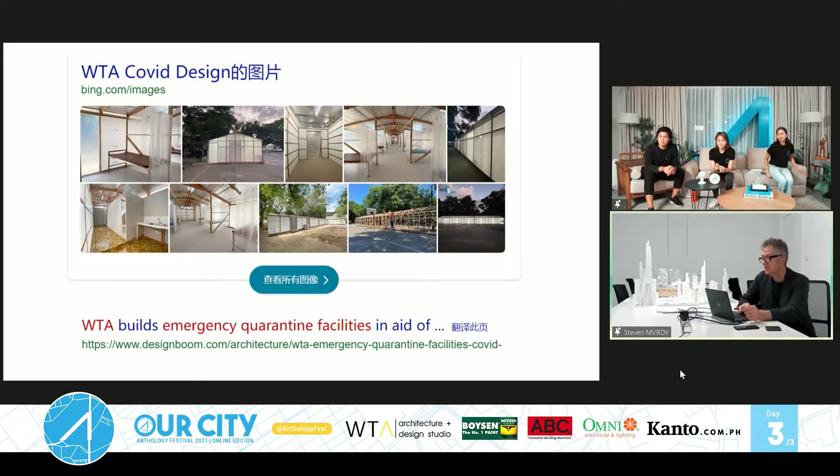I would like to start by congratulating the organizers of this forum. I was particularly impressed with the COVID design produced by WTA, as I did some research on what's going on in Manila, and truly that's acted as a very good initiative. I was impressed how fast the design was adapted for use. So congratulations to the people behind that in Manila.

We're all impressed. So actually, the theme for today is about what we call hybrid architecture, and in particular why hybrid architecture is related to the circular economy. MVRDV has always pioneered radical urban scenarios, in particular as they need to fit the challenging 21st century context. We believe humanity has reached a pivot point in history, and we expect in the coming decades, with urbanization speeding up, technical, virtual, and ecological agency will shift human behavior. We believe this requires new hybrid architecture, new relationships between the man-made, the technological, and the natural.

We will show a dozen projects tonight, and I'm going to race through them because there's quite a lot of content. By the way, like your excellent COVID initiative back in the Netherlands, our teams are basically working in lockdown, which has actually been quite interesting, given that in a way we got closer together because of Zoom. One of the reasons I could pull this Zoom together tonight is that we got very skilled in essentially working online, and I think this online collaboration has been a significant benefit, if you could mention a benefit under this lockdown.

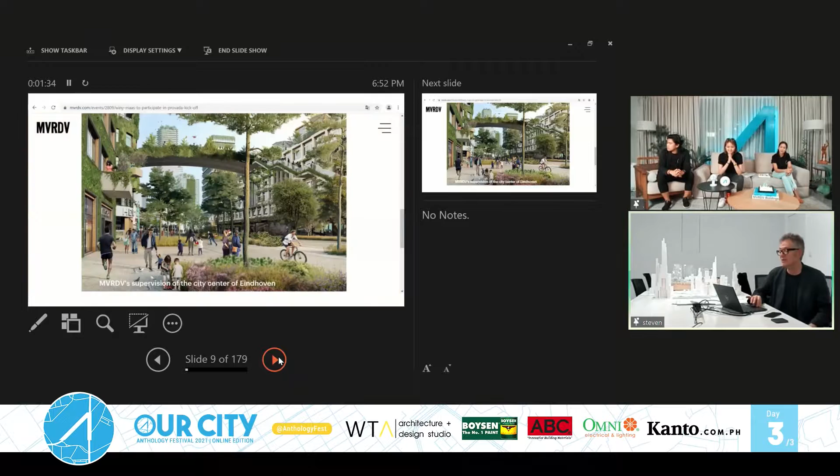So that was Winy Maas, our founding partner, very influential in urbanism in the Netherlands and globally. The second partner I want to introduce was Jacob van Rijs.

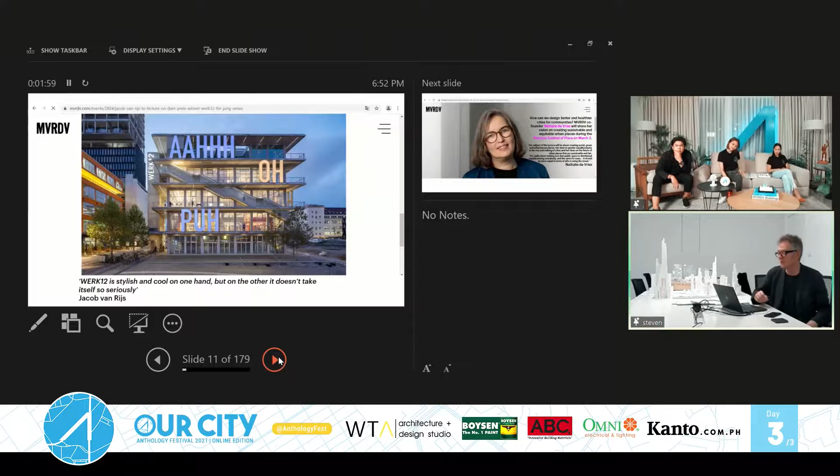His studio just won the best bit of architecture in Germany for 2020 with a building that looks like this. It's very much building in the trend of the circular economy, ultimate flexibility, understated, but with the use of an artist that reflects some of the cultural vibe in that creative hub in Munich.

Our third founding partner, Nathalie de Vries, has also been active this month in various festivals online. She's one of the most influential architects in the Netherlands and also recently won an award with this building in Poland. This is an existing building that has been given a new life.

As you can see, one end of the building is classical, an old heritage building. The other end has been basically brought into the 21st century as a creative hub, with a lot of use of local artists to really focus on the interior of the building, and at the same time bring green onto the roof and so on.

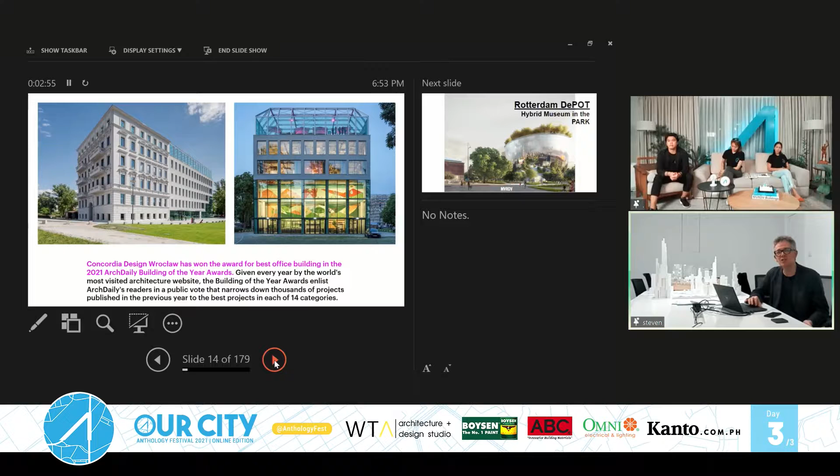This is actually typically a project that fits the talk, which is about hybrid architecture and circular economy - recycling the building, and hybrid in this case being the perfect combination of the old and the new.

The next project I'd like to talk about quickly is simply because it's in the news a lot this year. It's the newest museum in the Netherlands by MVRDV, called DePOT. It's a hybrid museum in this way, in that it's essentially a new type of museum where it's combining the park as part of the building.

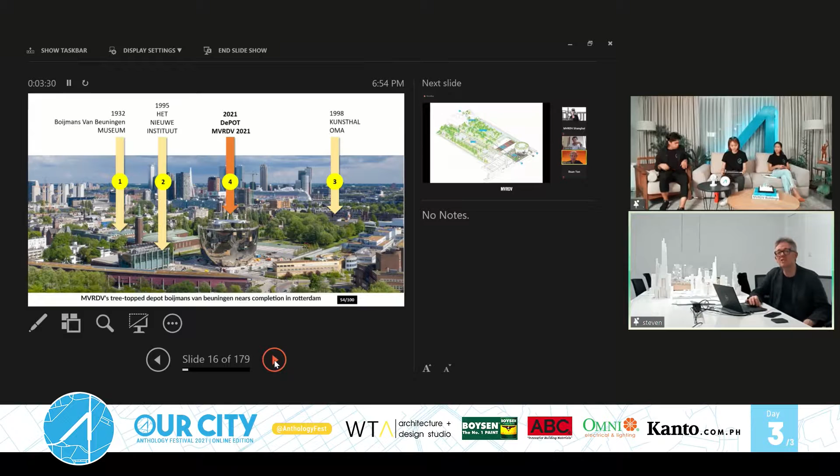At the same time, it's bringing art that is usually in the basement - the archives of the museum surrounding it - now brought above ground into this iconic building that reflects the city in a very interesting way, while it's covered in mirrors.

On top of the building, we created a new park because the footprint of the building stands in the existing park. Upstairs, after you've toured the museum, you can go and enjoy that new city forest, while at the same time enjoy food in a new restaurant.

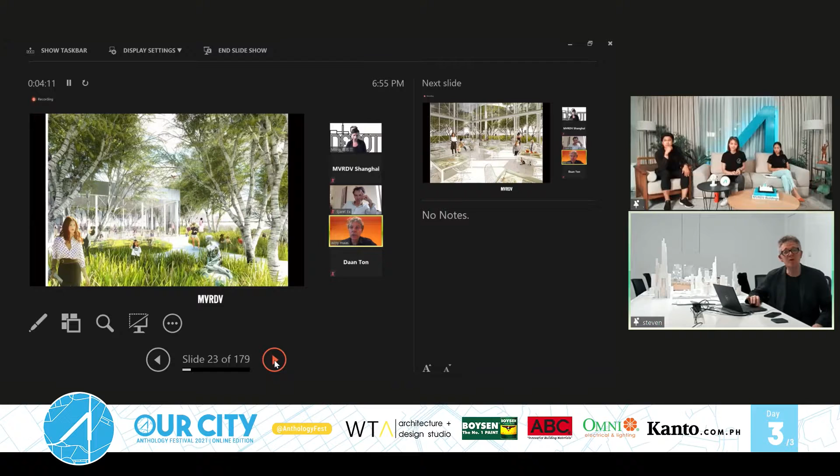So this is a building that will open this year and has a lot of impact already simply by opening up the entire ecosystem of museum conservation to a new type of museum facility - very educational in how people store art, etc. Talking about that issue of the circular economy in regards to architecture, which is very much about transformation of buildings.

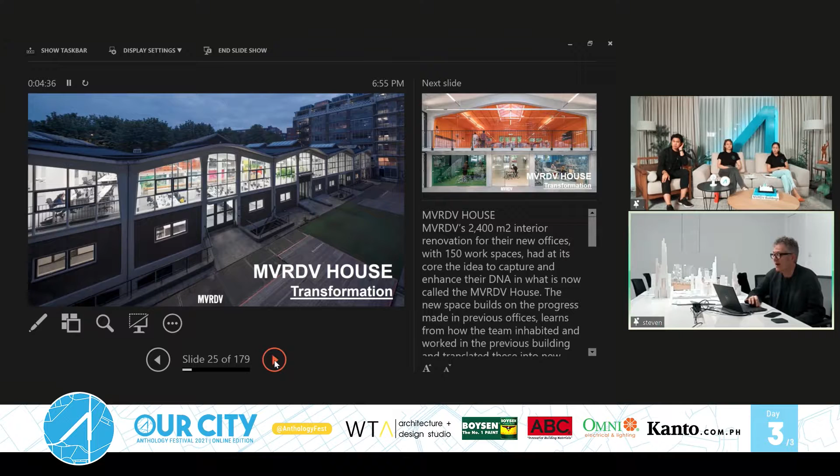Our existing office in Rotterdam is actually in a 1950s industrial building. It's called MVRDV House. It has quite a reputation in the Netherlands as that architect office that managed to create a vibrant hub around itself.

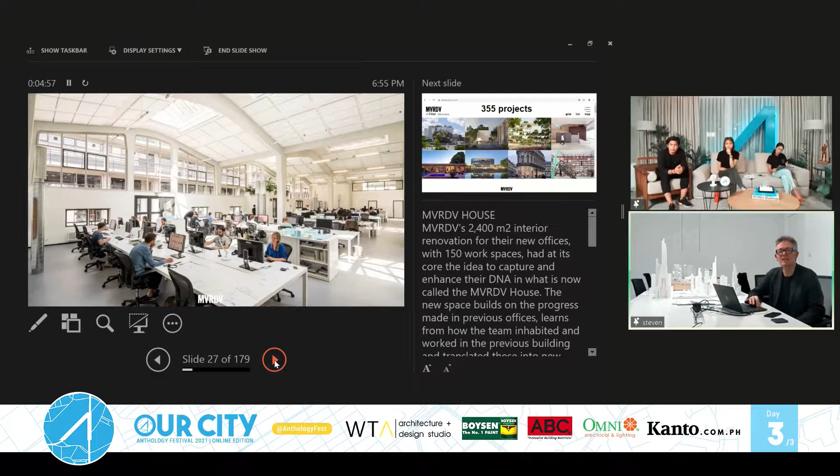It's a very open building, bringing creativity into the old industrial design of this high ceiling building, and at the same time, this is where all these projects get created.

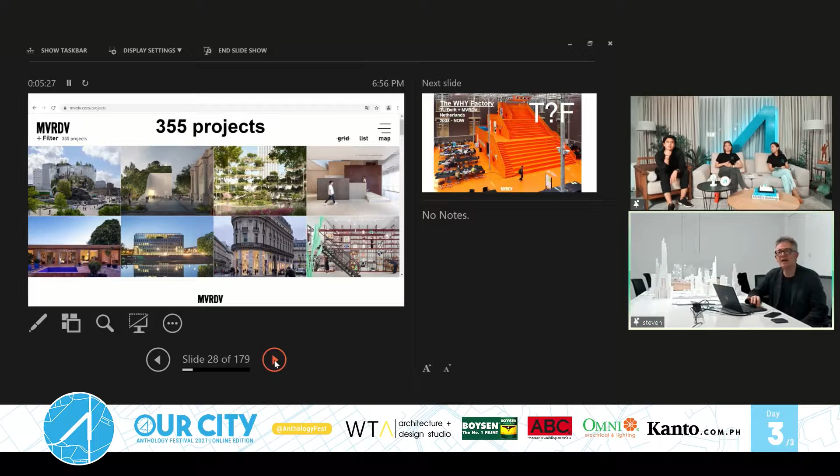MVRDV, in total on the website, you can find 355 projects. Obviously I can't show them all, but you can already see on this combination, just random off the website, that a lot of our projects include nature. This symbiosis between nature and architecture is very much a red line that carries right through our portfolio nowadays.

Another thing I should mention is that MVRDV is also deep into research and has a think tank that collaborates with the Technical University of Delft in the Netherlands. We call this the Why Factory.

This is a place where MVRDV runs a lot of research projects for master students, where the future city is investigated. It's basically a laboratory for the city. It has had a lot of global impact because of the publications that come out of this Why Factory. For instance, in China, because we have many Chinese students doing master programs in the Netherlands. Our China experience also has impact on our research, and this vertical village idea, the vertical city, is partly a topic driven by our exposure to Asian projects.

So can the future city optimize hybrid 3D public space? Can the future hybrid city truly open towers to people and nature? These are the why questions, the how questions that come from our think tank.

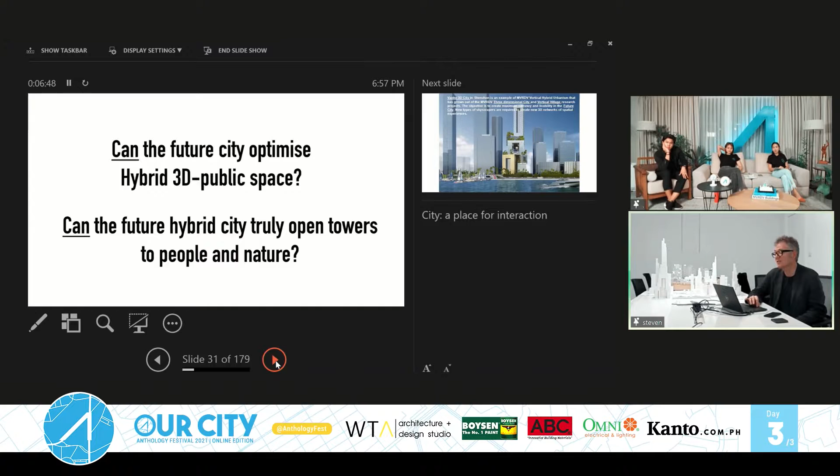I always like to start introducing our exposure to the Asian markets with this project we designed for Vanke, one of the biggest property developers in China. They wanted a new office building. We call it the 3D city, and it's very much an example of hybrid urbanism, or hybrid architecture, coming from three-dimensional city thinking.

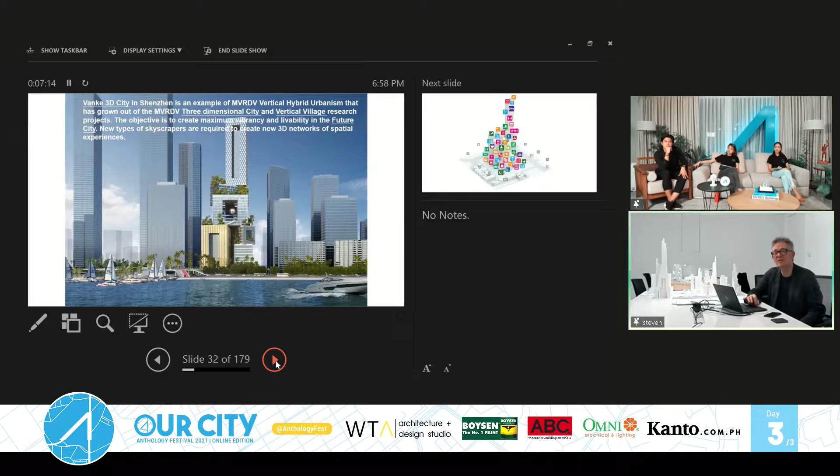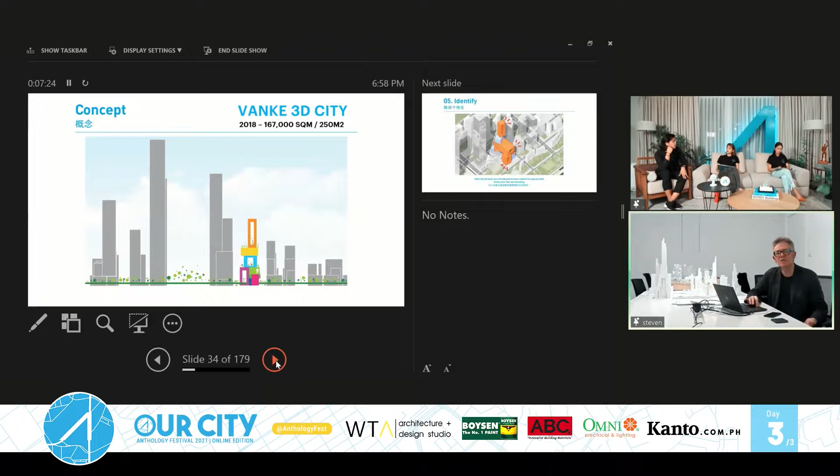You can see where we're trying to create opportunities to bring a lot of dynamics, a lot of greenery, a symbiosis of the city and nature to what is a very large-scale project in Shenzhen. This project is typical of how MVRDV works, optimizing opportunities for vertical landscape and public domain, trying to create a playful composition, a playful part of the city, especially when surrounded by vertical extrusions that become wind tunnels. What we're trying to create in this project is a more human scale, even though we're talking about hundreds of thousands of square meters.

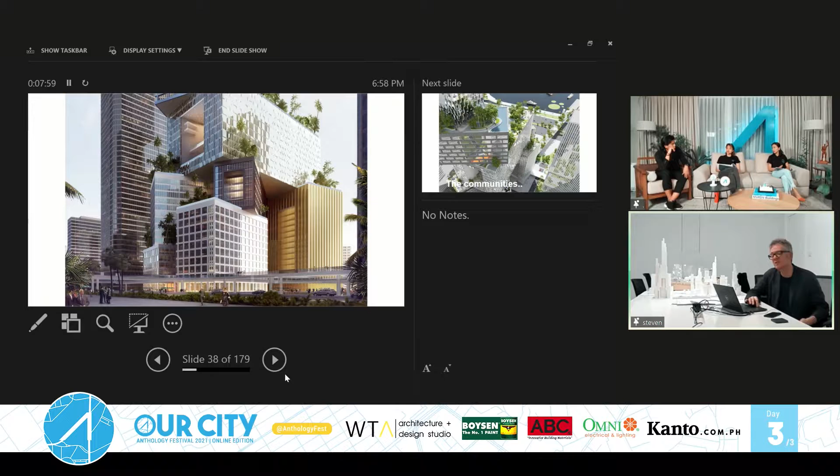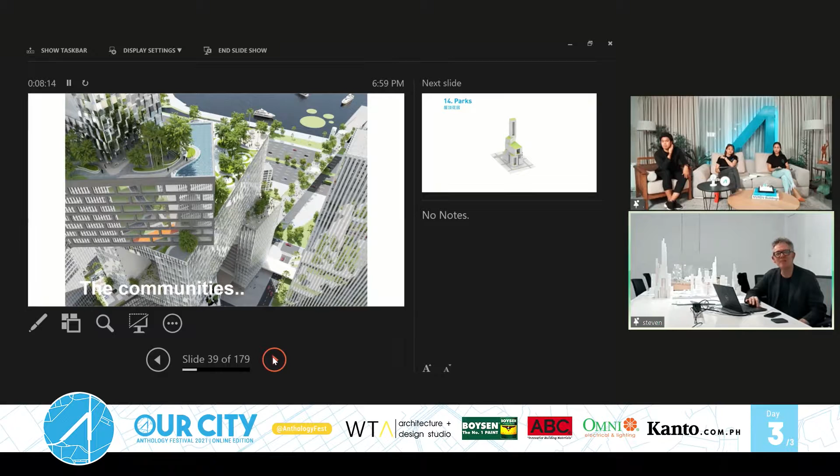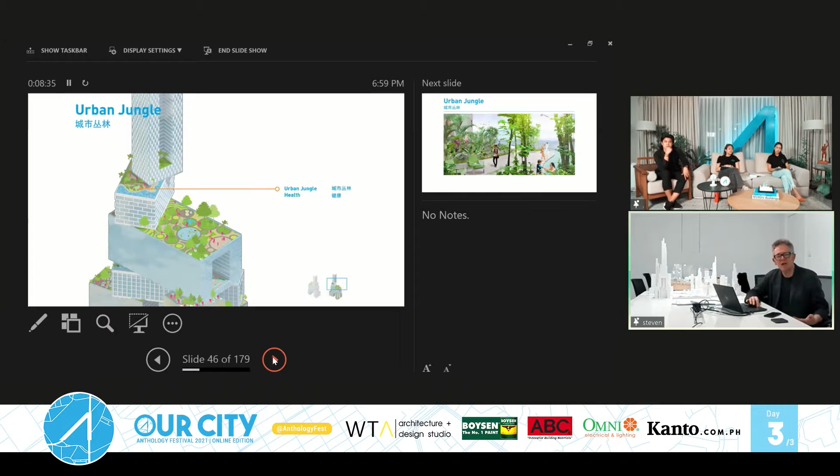Another objective in a project like this is to bring nature in its most vibrant manner to the architecture and create this vertical landscape, basically as many parks as possible within the footprint of the project, optimizing the land. In this particular project, we create a whole range of vertical gardens: a business park garden, a lounge park garden, an art park garden, vertical park, and the urban jungle that you can bring to this type of stacking of volumes.

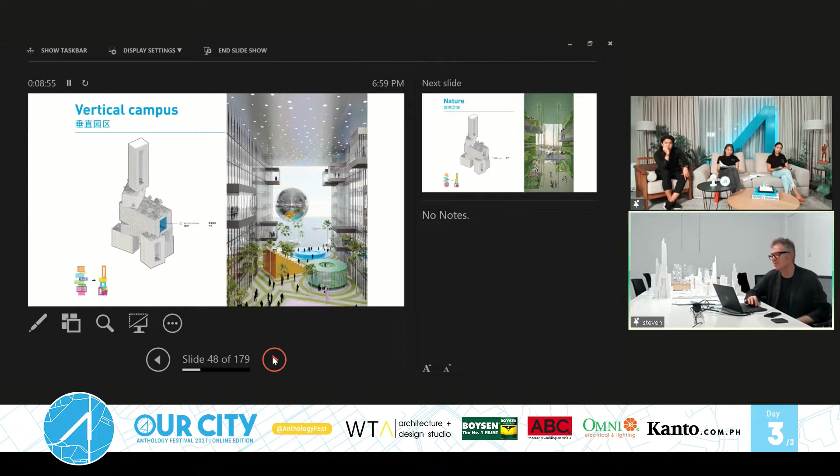What's also quite interesting, given the global nature of our firm and the fact that we are invited to many exciting projects and briefs, especially in Asia, this actually starts having an effect on our projects in the Netherlands. So in this project in Shenzhen, where we're working with big spaces or big windows into the world, that's also present in our work in the Netherlands.

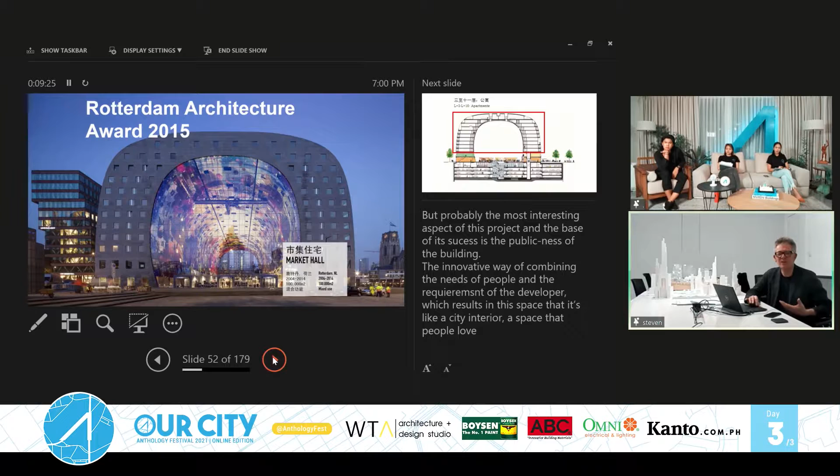This is maybe our most famous project currently in Rotterdam, our hometown, where we won this award in 2015 for the market hall. This is a scale influenced by our Asian work, and it's quite interesting how you have this cross-fertilization where a global practice brings some of its influences and ideas back to their home country.

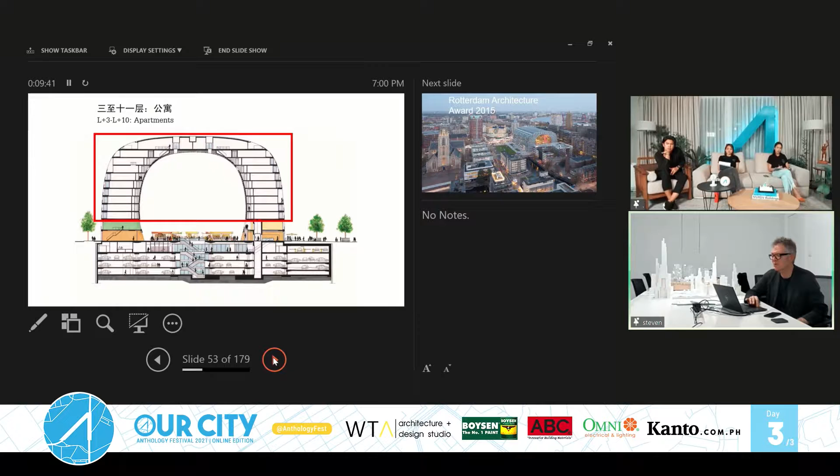This project sits in the city of Rotterdam, already slightly overpowering the surrounding buildings because of this larger scale brought to the city. But we do that for a reason, to create this radical space that expresses what happens in that space. In this case it's an indoor market hall, and it's again that sort of hybrid architecture combining the program of the marketplace while also building apartments right over this market hall, and at the same time expressing the culture of the country.

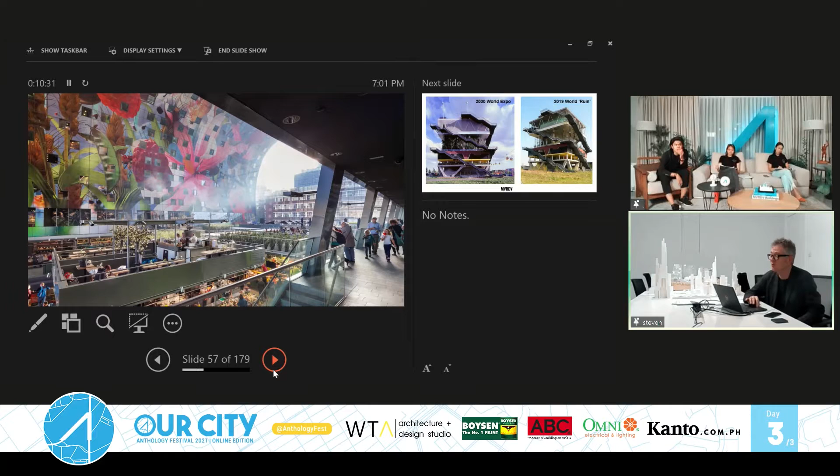In this case, the digital printing on that facade is inspired by 17th century paintings by the Dutch masters who painted still lifes that you see in museums.

Another very important project for MVRDV: 20 years ago we designed the World Expo in Hanover, Germany. 20 years later, that project became a ruin, but much loved by local youth culture.

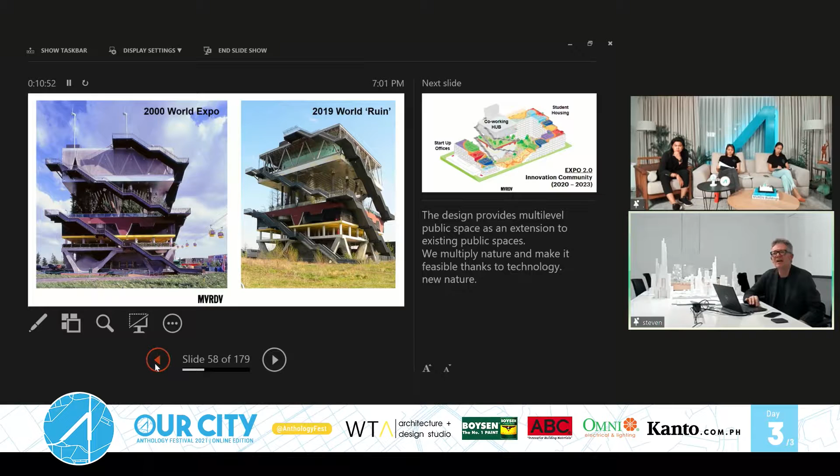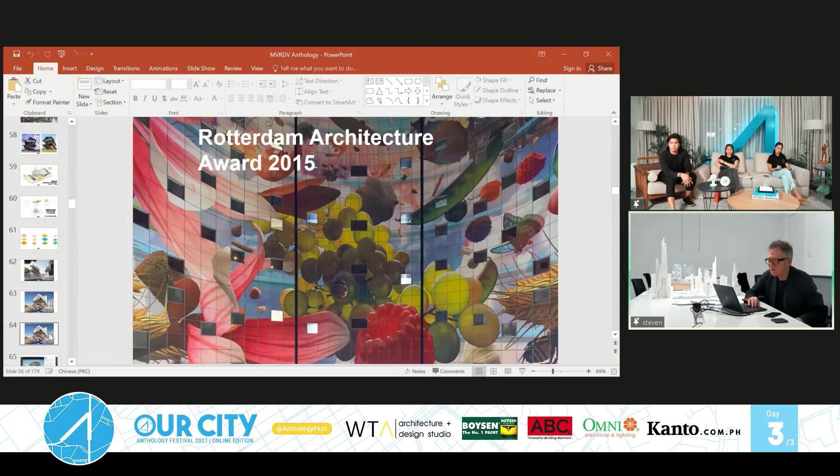Here we go again. Wait a minute. Let me go to that building again.

That Expo building, 20 years old, in the spirit of recycling, the circular economy, transforming existing buildings with the lowest carbon footprint, recently got a building permission to start construction. This is basically taking the old Expo building and turning it into Expo 2.0, the innovation community, combining the old Expo building into a co-working hub, surrounded by students who also have their startup offices nearby, a very much 21st century living and working project.

That recycled building was actually, in its day 20 years ago, probably the most radical nature city expression. It was basically one of the first projects that became a reference for including vertical landscape on the floor plates.

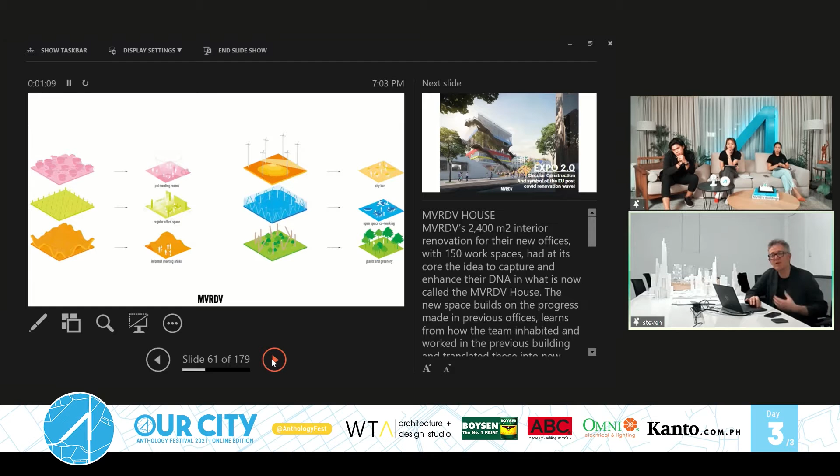Originally multiplying nature with the help of technology. Now these floor plates are being adjusted to a new function, giving us the Expo 2.0 project, which is all about circular construction, and in a way also a very good symbol of the EU post-COVID renovation wave.

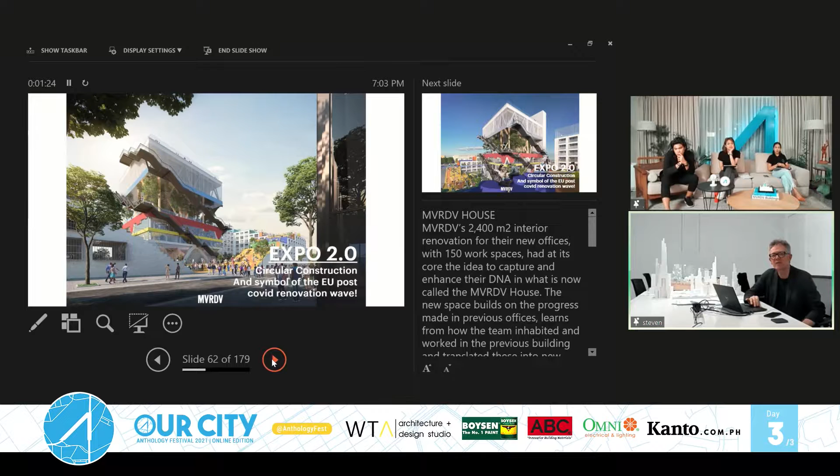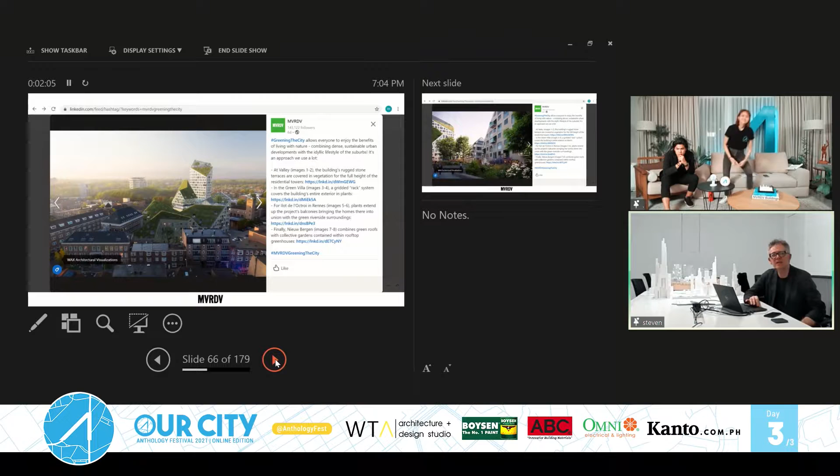You can see how that building from 20 years ago, which is very much an iconic MVRDV project, was very influential for ourselves. In recent projects there is still a lot of that spirit of not being afraid to express nature. This is in Eindhoven, where Winy Maas is advisor to the city government, and where the newer post-COVID master plans have led to far more possibilities to bring green living to the city in many different forms.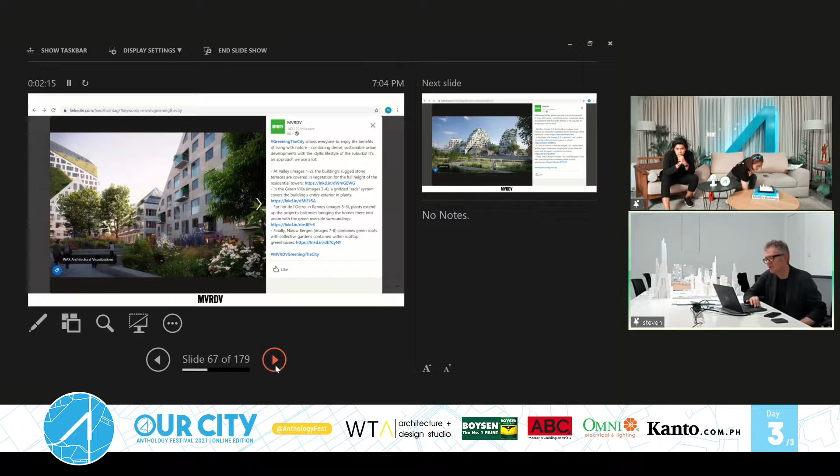So once again, it's almost like that Expo building was 20 years ahead of its time. But time has now caught up, post-COVID, but not only post-COVID, also post-Paris 15 and post the Dutch climate accords. A lot of the innovative ideas from the last decades can now actually be realized readily, and there's just a huge demand to bring green to the city in combination with circular economy initiatives.

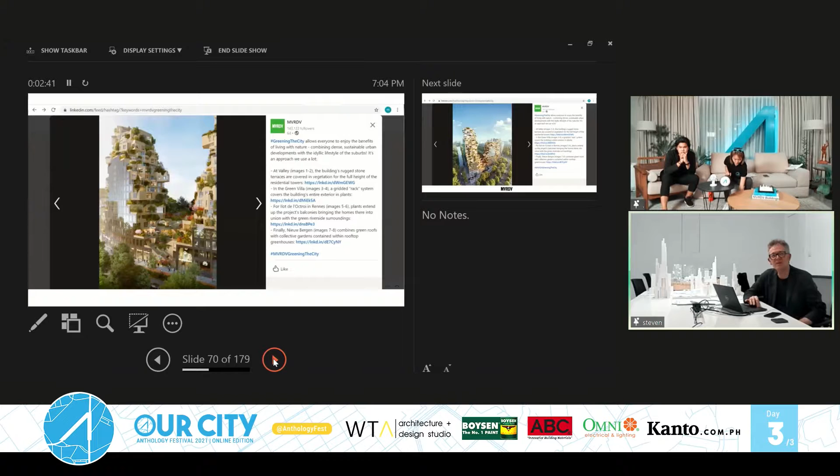This is a project that is in Amsterdam, I'll show you a little bit later. By the way, this is our LinkedIn page, which also gives an update of our current projects.

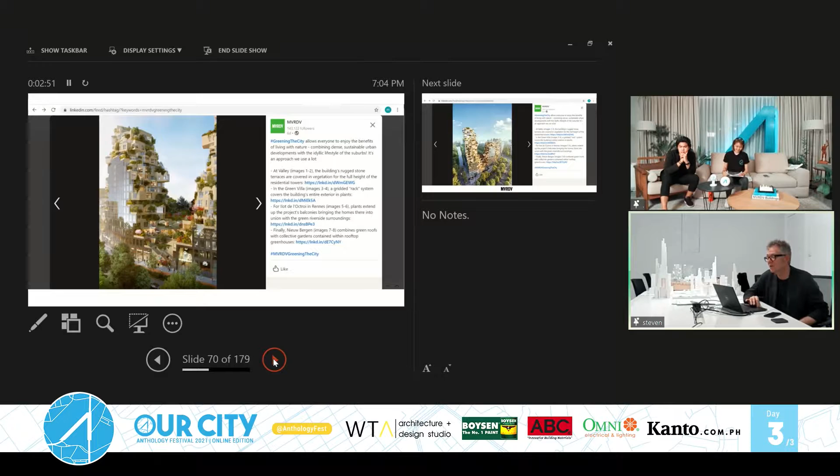Another project, again, that is about hybrid architecture in circular economy. This is a program that needs an architect every 10 years - the Floriade exhibition in the Netherlands, held every 10 years. This time MVRDV was selected to create basically a city that can hold this Floriade exhibition about flowers, that after the exhibition can continue as a new district for a new suburb outside Amsterdam. So the idea of this island is basically a flower expo, similar to the World Expo, that can then be turned, recycled into a city based on flowers and trees.

I'll just quickly go back to this thing I mentioned earlier, that MVRDV, as a Dutch company from the Netherlands, and the Netherlands being part of the European Union, a lot of thinking to do with architecture and design is very much influenced by Paris 2015. In the years immediately after Paris, very radically sustainable architecture started to be built.

And this started leading also to deeper questions about the future of construction. How does construction fit in the circular economy? Why is the built environment one of the 5 key sectors to make the economy more circular? And with circular, we mean, of course, lower carbon footprint.

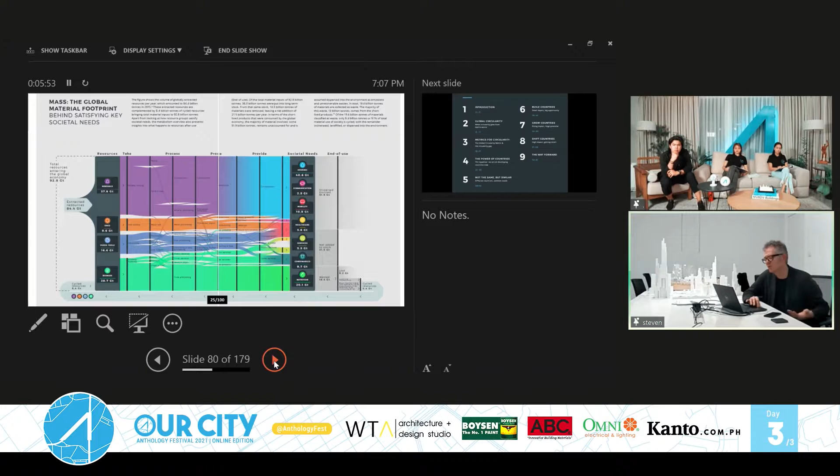In 2019, the world is 9% circular. It's in fact going in reverse, because in 2020 it was only 8% circular. These types of issues are also very much studied at the Why Factory, really looking at what's the role of the built environment in the total resources entering the global economy. So you need to look at this globally - embodied carbon. How can architects contribute to bringing that embodied carbon down?

One thing I wanted to mention, which I think is very important, is a new movement in the Netherlands, also co-founded by MVRDV, which is this open building movement.

It is part of the open building movement. A lot of architects are starting to follow a similar manifesto. I think it's going to be very influential, and they're trying to bring it to China. It also fits in tandem with the European Green Deal, becoming the first climate neutral continent. It's going to have a huge impact on architecture, in our view.

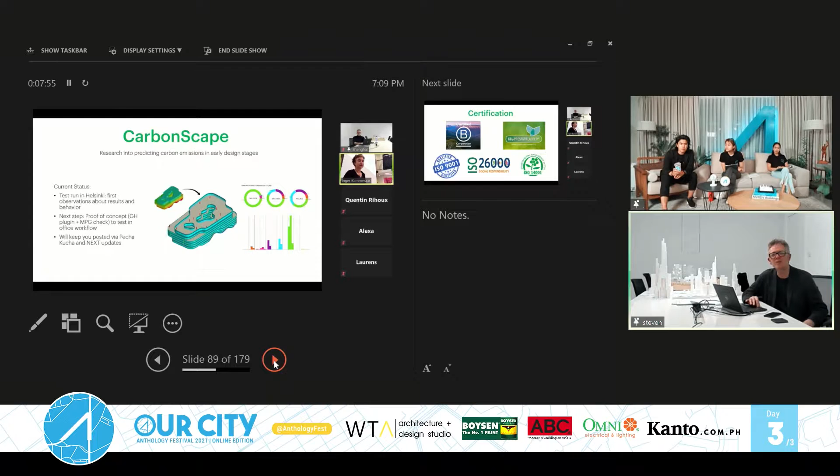This slide shows our CarbonScape software. MVRDV has a group called Next, and they develop new software that helps us design low carbon footprint buildings. This is very important because as projects and organization are ramping up, it's important to have fast tools to help deliver these low carbon footprint buildings.

For instance, one of the certifications MVRDV is part of is the CO2 Prestatieladder - Prestatieladder is a Dutch word. It means it's a certification that collectively leads to lower CO2.

Taking you to another project we're doing in Amsterdam, a little more advanced, under construction - this is the Valley project. Again, what I would call hybrid architecture, because it's a project where we bring nature into a hybrid building between a corporate office building with flat facades and a very open residential group of apartments grouped around the valley.

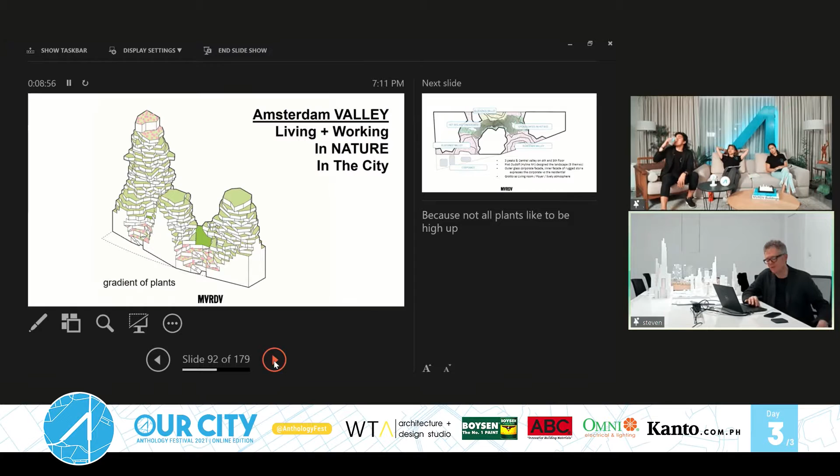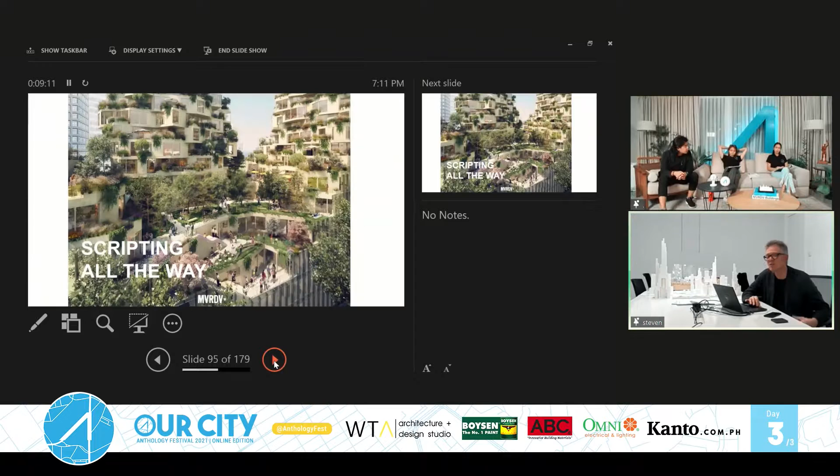If you know the Netherlands, it's flat, so to bring a valley into the city like this is, of course, very unique. This valley has planting designed by the landscape designer who worked on the High Line in New York, Piet Oudolf. He's designed the plants to suit the different climates as the building rises up to 100 meters.

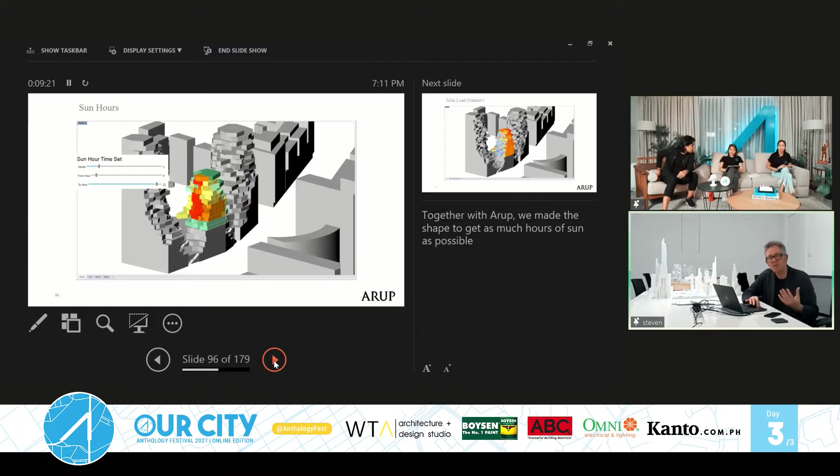We use a lot of innovative, very parametric software. It might look chaotic, but it's actually parametrically optimized for sunlight and privacy. We've been using these projects to develop better software to be more creative, while bringing in all the parameters that lead to low carbon footprints.

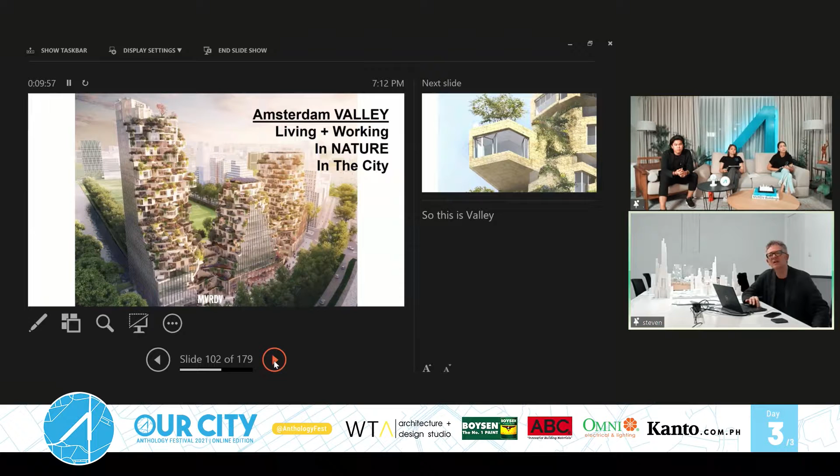This is probably the most anticipated construction project in the Netherlands. It even has a museum in it, and retail as you go up the valley. And of course, a lot of solar and sustainability features, water recycling - top of the range, new generation hybrid architecture that we do in the Netherlands.

Also, I have to say, this is influenced by some of the projects we do in Asia, because we play with similar ideas on a large scale in China as well. So living and working in nature in the city - that's a real MVRDV slogan.

Of course, I'm going to show you some China projects because that's where I'm based, and MVRDV is very excited to work in Asia in general. Of course, the problem we have here is a carbon footprint that is obscene, or how do you say it?

It's all part of the drive in China to achieve higher living standards, and a lot of the cities need serious work, and it's understandable that the carbon footprint that comes with that is large.

So in our projects, not just in China but Asia-wide, we're trying to come up with new ideas that also look at recycling of buildings, because the lowest carbon footprint building is one that, A, is not built, but B, is reused.

This is a project in Taiwan, Tainan Spring. We basically turned a department store that was at the end of its life into an urban lagoon. It's one of a kind - basically bringing nature into the city.

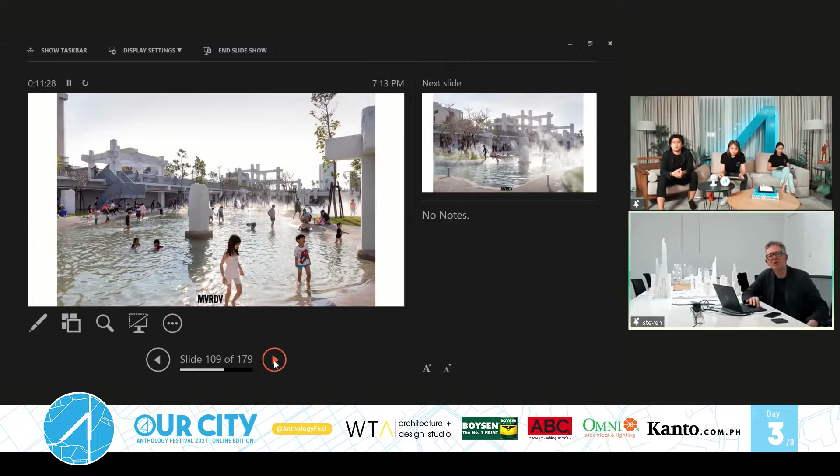This is a part of Tainan where there used to be a waterway that was built over. We bring the water back, bring the people back, and at the same time express that there was a building there, giving it that cultural connection still with the past.

In Seoul we have actually recycled the freeway, and we call this a sky garden. It's basically a planted village on a former city highway.

This has been an obvious thing to do, yet it doesn't happen often enough in cities where freeways can become obsolete, be tunneled, or otherwise bypassed. So it's a nice way to bring essentially a botanical garden on top of concrete. This is like a kilometer-long park, with 645 trees, over 200 species, and 24,000 plants, which will mature in the next decade into what used to be concrete becoming a forest.

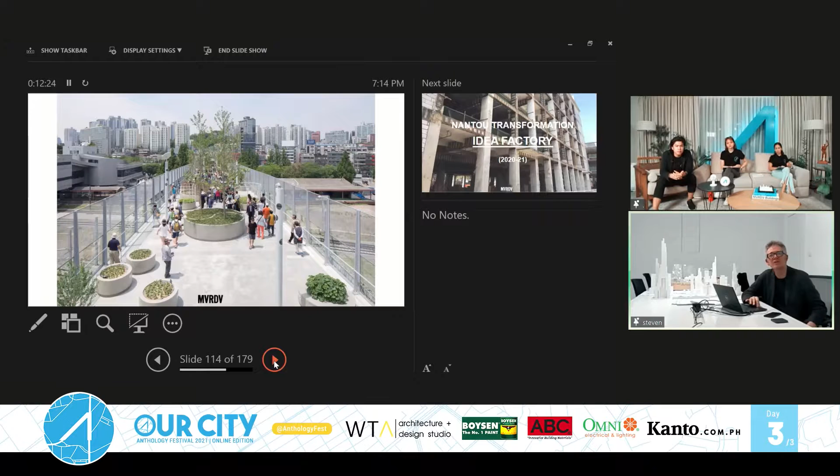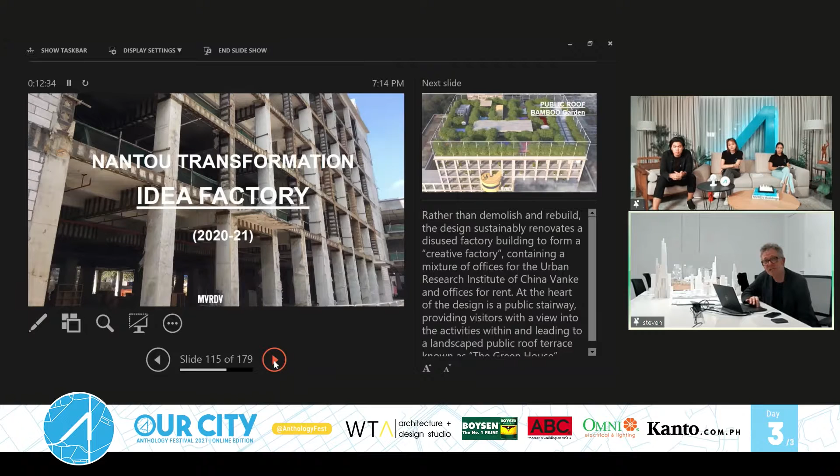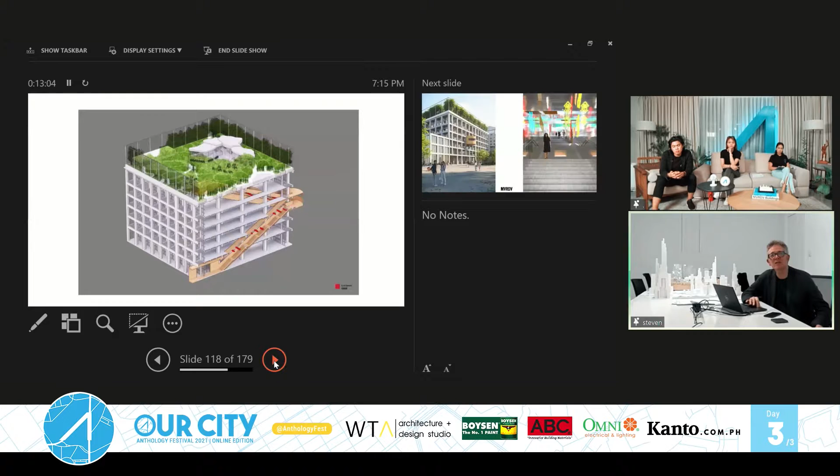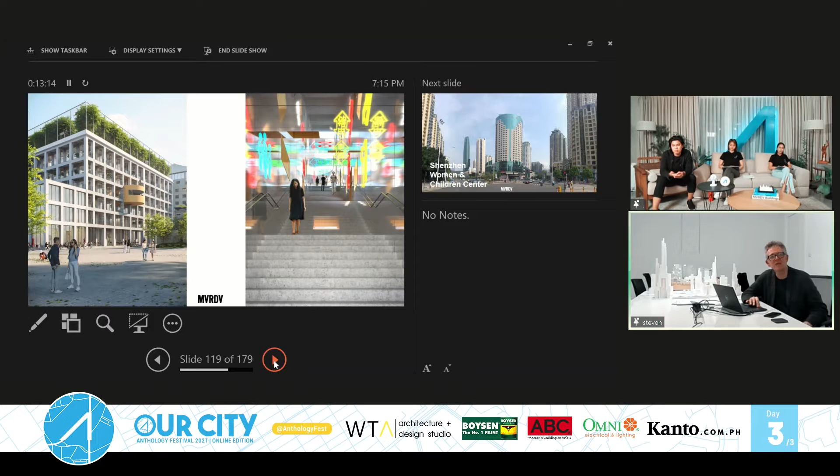Another transformation project we did in China recently is Nantou, a village in the middle of the mega city of Shenzhen. We turned an old factory into what we call a creative hub, the idea factory. We bring a landscape onto the roof, in this case a bamboo forest with a whiskey bar on top, creating a public roof where there wasn't one before. It brings a lot of green into the mega city. One key move here, given budget constraints, was to do one thing really well: tunnel through the building to give public access directly to the roof, bypassing all the creative offices for the younger entrepreneurs, of which there are many in Shenzhen.

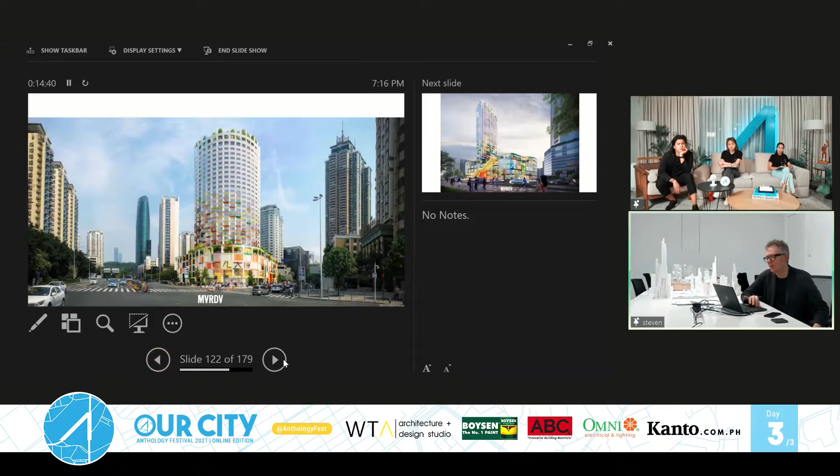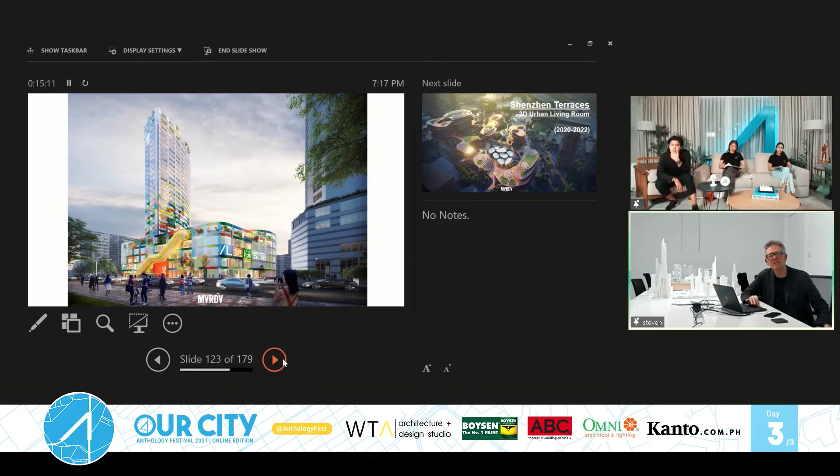You can see on the top left the gray concrete building, the entrance, and how we apply these policies to bring color in, upgrade the circulation, upgrade the facade, and turn it into a completely new personality in the urban fabric. This women's center, which has a large component of program for children, theaters, learning environments, kindergarten, apartments, and a hotel on top, will basically revitalize what is a 20-year-old part of Shenzhen. If you know Shenzhen, a brand new city, the first part of that new city has become a little worn out, so bringing these types of buildings into Shenzhen and other Chinese cities is something we're really looking forward to doing more of.

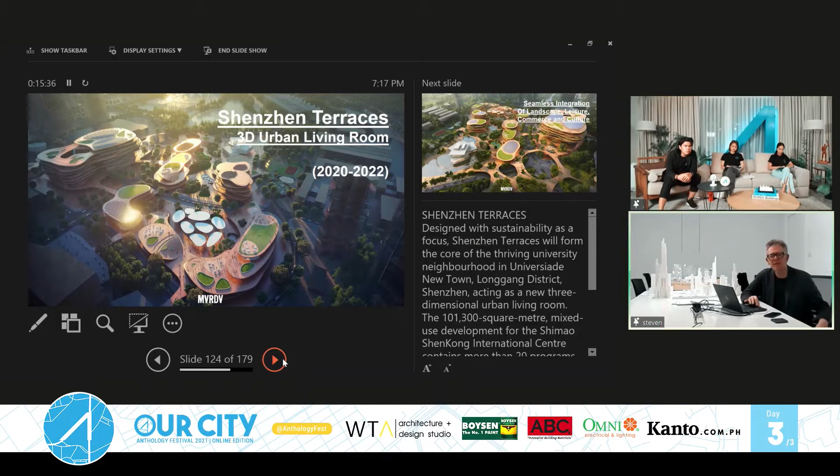While we're in Shenzhen, another typical MVRDV approach is to create an urban living room by building terrace landscapes surrounded by towers done by others, so people in nearby apartments and offices look down onto a terrace landscape. We're inspired by the famous rice terraces in China, but the key here is to achieve seamless integration of landscape, leisure, commerce, and culture. This project will start construction soon. It has very high sustainability content and is again a hybrid between landscape and city, with a very dynamic program including theaters, libraries, and cultural centers, and as it overgrows with landscape, it will basically become an urban jungle.

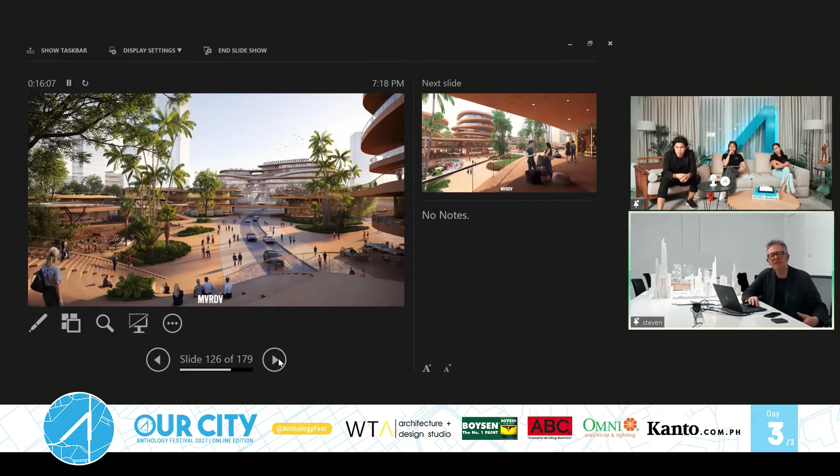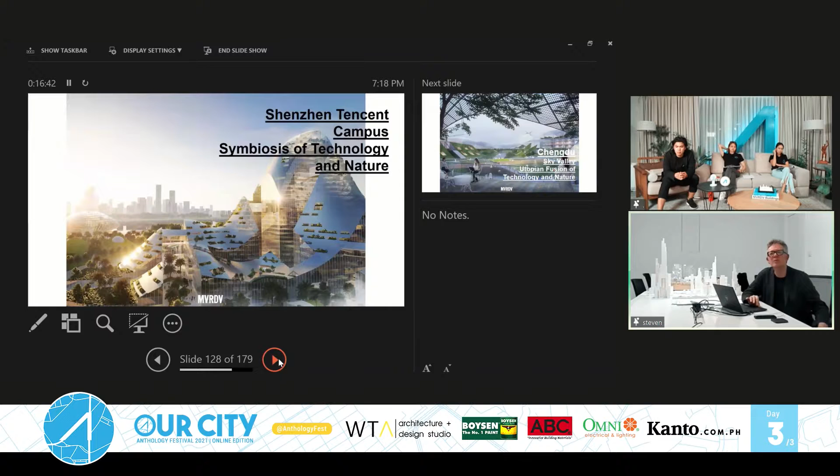One of the larger projects, a new idea we worked on, was for Tencent, basically the Facebook of China. They own the WeChat ecosystem, and Tencent is building a new city for their very fast-growing workforce. We worked for two years on a project trying to optimize the symbiosis of technology and nature, bringing a massive amount of solar cells into a campus. We lost that competition, being too radical, but these ideas were used in Shenzhen and made their way into a new project in Chengdu, which we call Sky Valley, again a utopian fusion of technology and nature, adjusting ideas from the unsuccessful Shenzhen competition to fit the Chengdu brief.

I don't know if people know Chengdu, but it's in Sichuan, and it's not flat, it has a slightly hilly landscape. What we tried to do, as you can see here, is contrast with the surrounding, more generic Chinese urbanization thinking by working with the topography of the landscape instead.

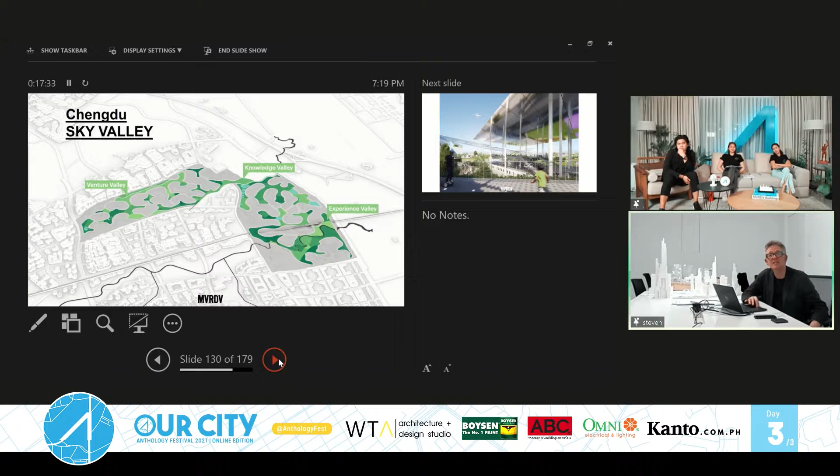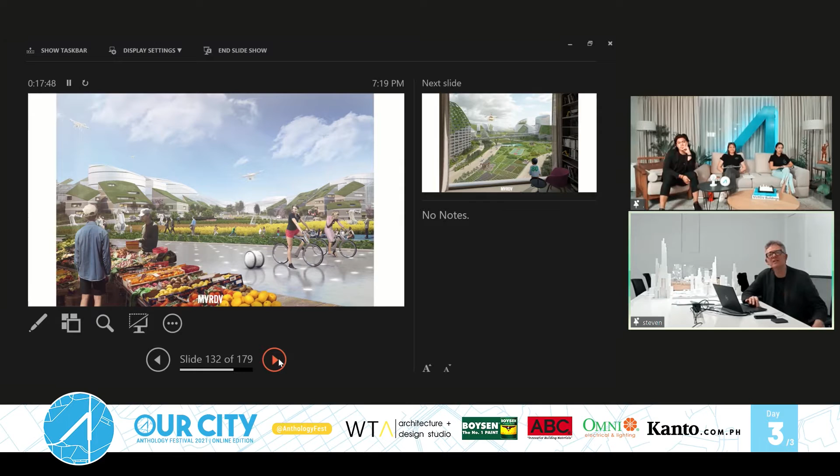Essentially what we're doing is building a city sitting inside an urban farm. Sichuan is very fertile land, and it would be a pity to build over it. So this future science city is combined with a farm, and there's a lot of this type of thinking and design going on in China, not just by us, but by a lot of Chinese firms, avant-garde firms, and international firms too. The Chinese government is also open to these hybrid cities, which increasingly influence older city planning standards.

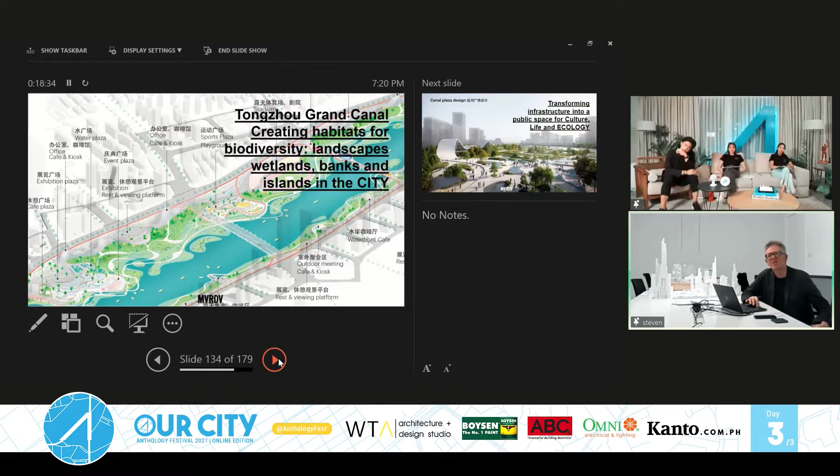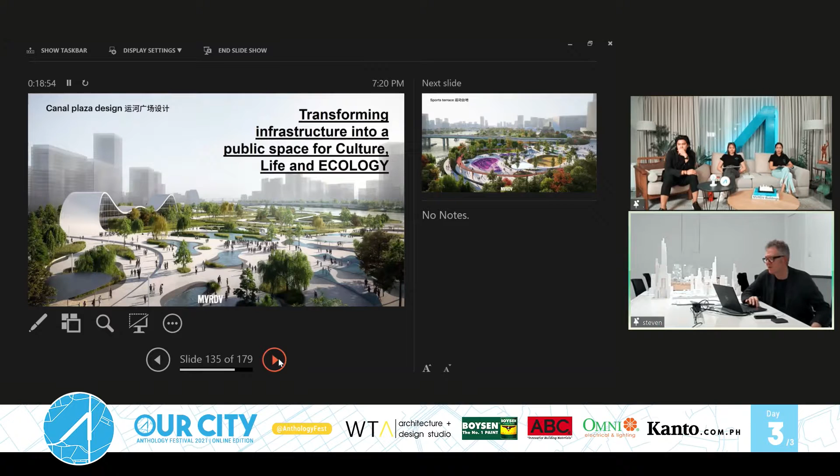In Beijing, on the Grand Canal, we're creating a habitat for biodiversity by naturalizing what is essentially, at this point, a relatively industrial straight waterway. We're naturalizing it to allow more room for the water, wetlands, islands, etc. in the city. This is a typical competition in China where the government is extremely ambitious to counter the monotonous concrete jungle that has been created, knowing it needs to improve for the well-being of citizens in the mega city.

So as you can see, everybody is very active in landscape, urban planning, urbanism, or hybrid urbanism, as we call it. Besides being an urbanist architect, Winy Maas is also a licensed landscape architect, and we cannot think of architecture separate from landscape—it is part of the same. You need all these disciplines to get these holistic solutions.

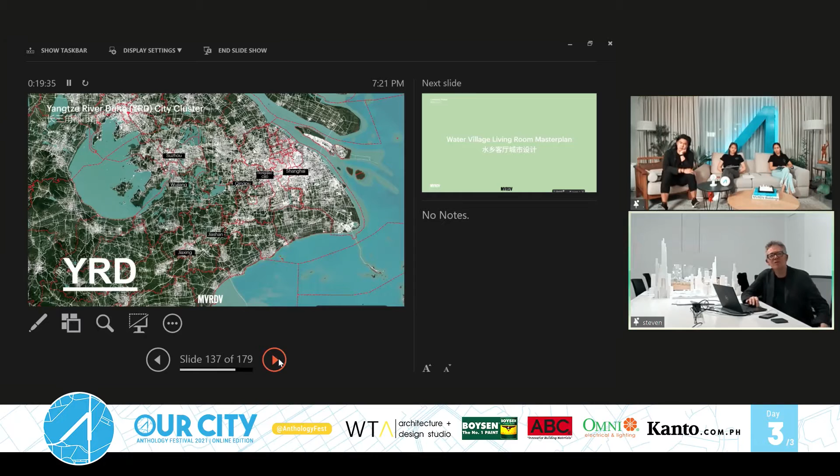YRD stands for the Yangtze River Delta, the provinces outside Shanghai, and we have various projects going on. One of them is what we call this Water Village Living Room Master Plan. Around Shanghai you have these old water villages that have an interesting relationship with the water. It's a very flat delta, and some of the older villages need to bring new life in—the young people have moved to the center of the city, and the villages have become empty.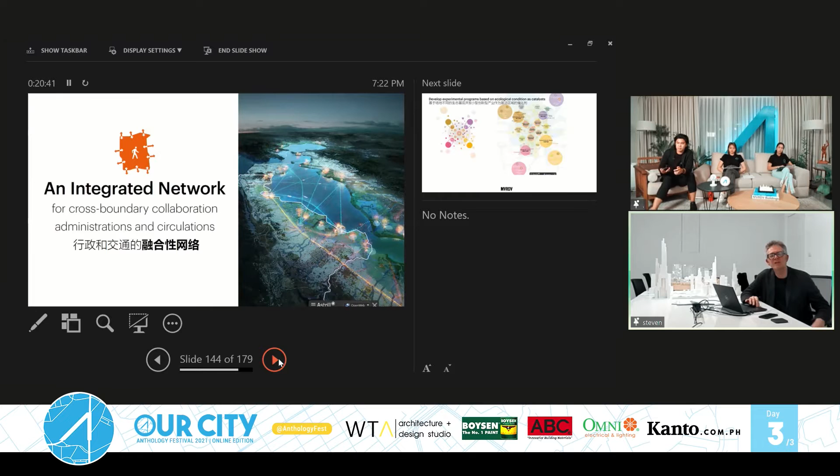So we bring in a new economy, new landscape. A lot of the ideas come from our Dutch projects because we're also in a delta in the Netherlands. But again, we're trying to create a symbiosis between human, flora and fauna in the water villages surrounding Shanghai, and to create this integrated network, cross-boundary collaboration, because these villages sit within different administrations and span a wide area.

These type of larger policies could achieve this cross-boundary collaboration, essentially creating a new economy for places where most of the industry has become obsolete, bringing new experimental programs and experimental economy. In fact it's based on circular economy thinking and ecological conditions—a typical exercise we do for the Chinese government around Shanghai. In Shanghai we also do zero carbon, zero emission type projects.

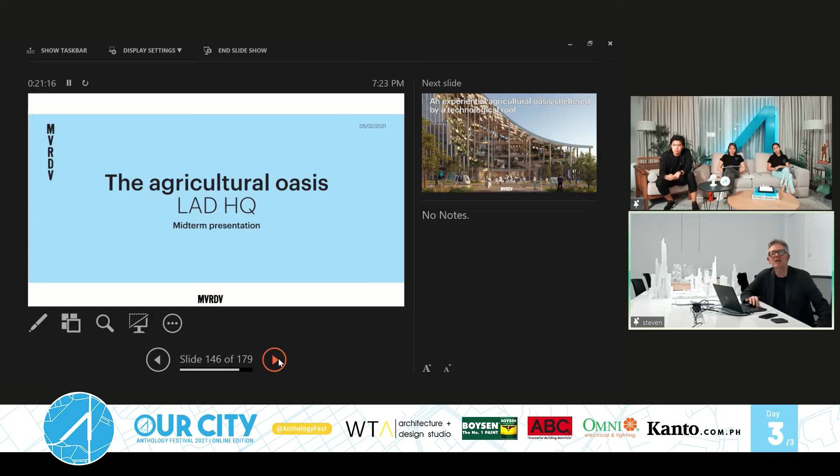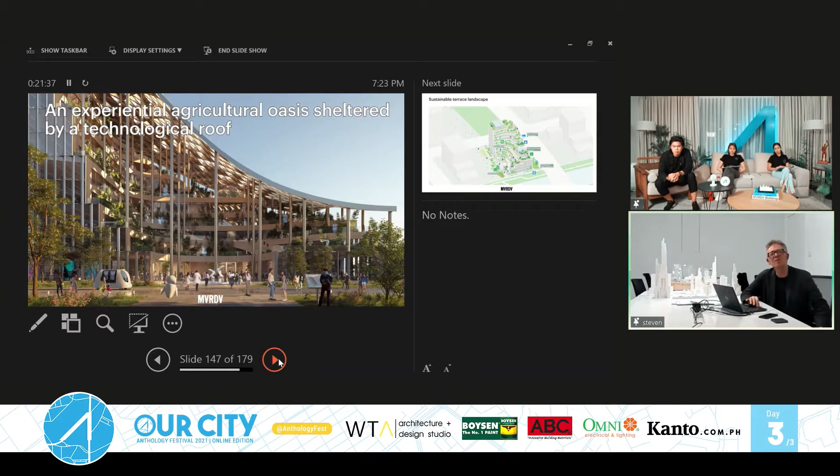This is a headquarters for an agri-business company, where we again play with this terrace idea, and also achieve that zero carbon footprint making heavy use of solar panels, while trying to create a comfortable set of environments under that roof in summer. Shanghai is quite a hot city in summer, with a lot of solar load.

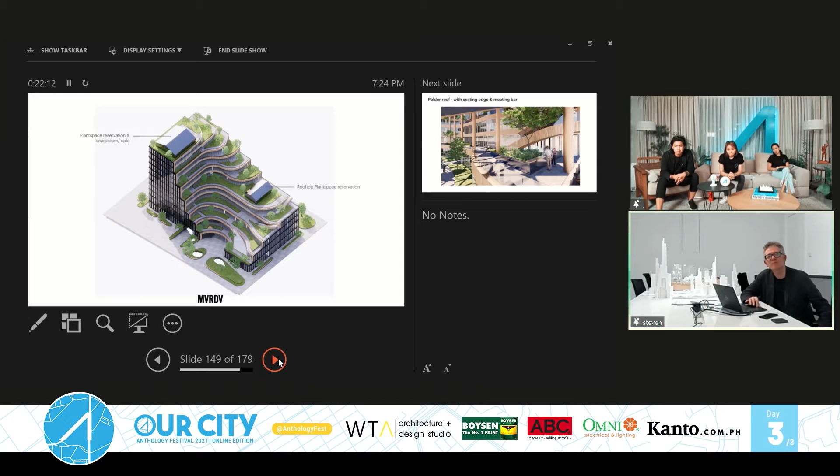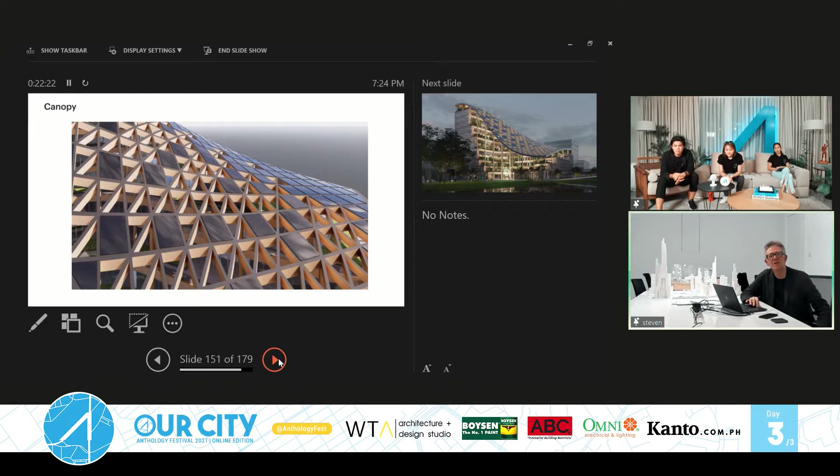So as you can see, under that roof we terrace the building, giving all the office users access to greenery, and at the same time, in a clever way, we include solar on the curtain walls. There's a lot of opportunity to take the green right through this project, including the solar canopy, which is optimized for solar exposure.

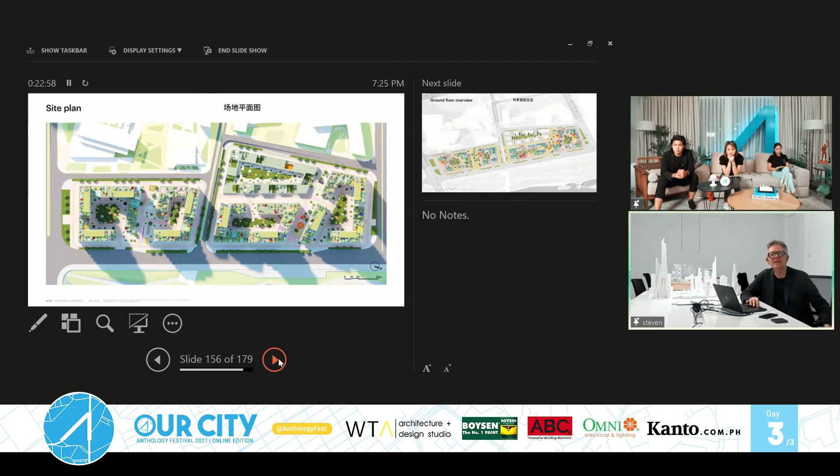What we've designed for them is a community that is completely modularized. We're working on a grid, with apartments that are optimized and can be stacked in different ways, and at the same time, by stacking, allowing a lot of greenery to be included in the composition.

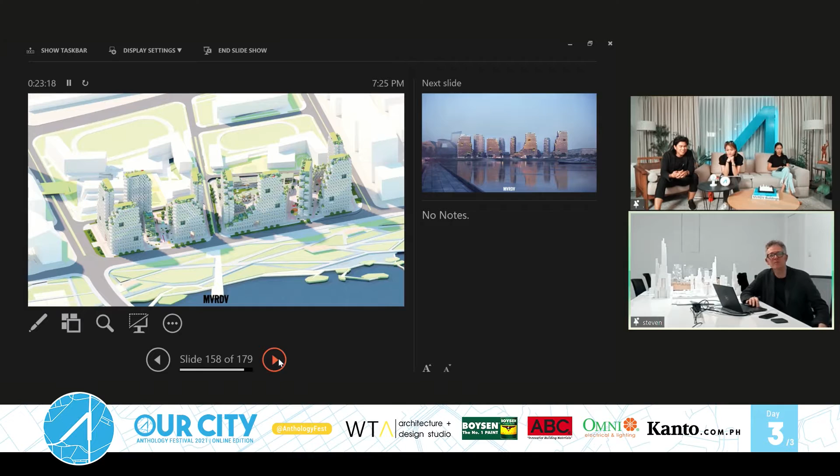We're trying to work with Chinese manufacturers that are now coming up, with government support, to move very much into prefabrication, because these prefabrication units can have a low carbon footprint that allows a lower carbon footprint for the entire community. It's got voids in it, as we always do in our vertical projects, to bring open space that can be shared between these studio apartments.

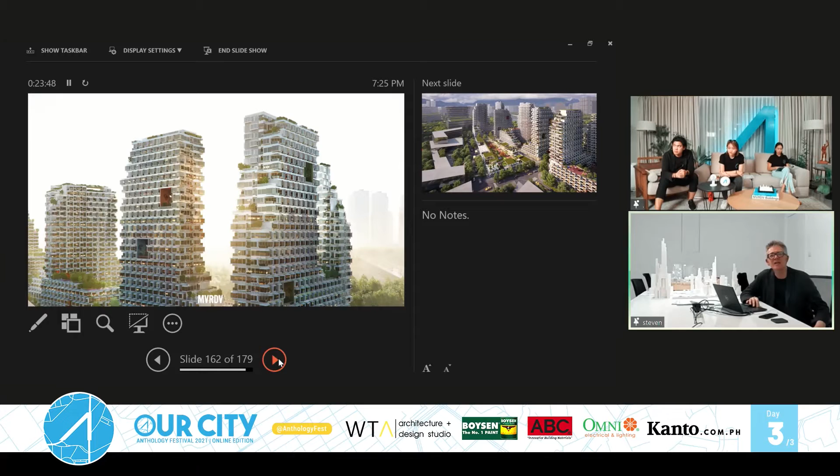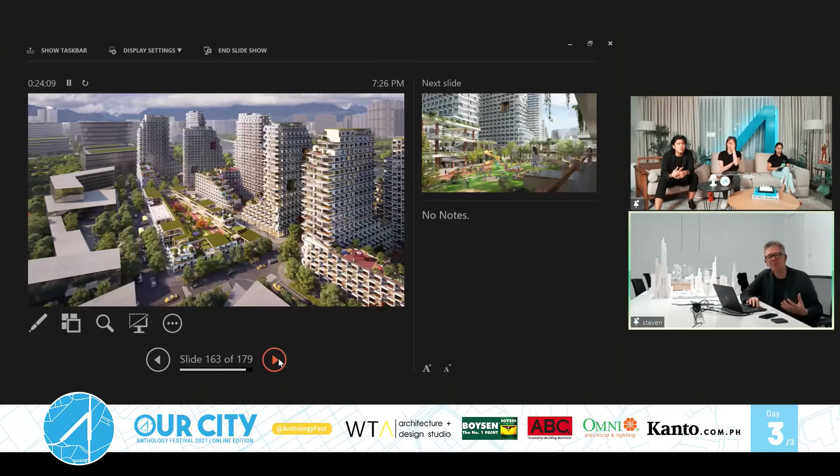And then there is the kindergarten that, together with the units, creates this instant community. We're quite excited about it because we're really into prefabrication—it allows a more measured sustainability to be included in a single unit that can be prefabricated in factory conditions.

This is the kindergarten as it's sitting in between the towers with the units. Optimized apartments, optimized for view, optimized for ventilation, and just optimized for clever use of space.

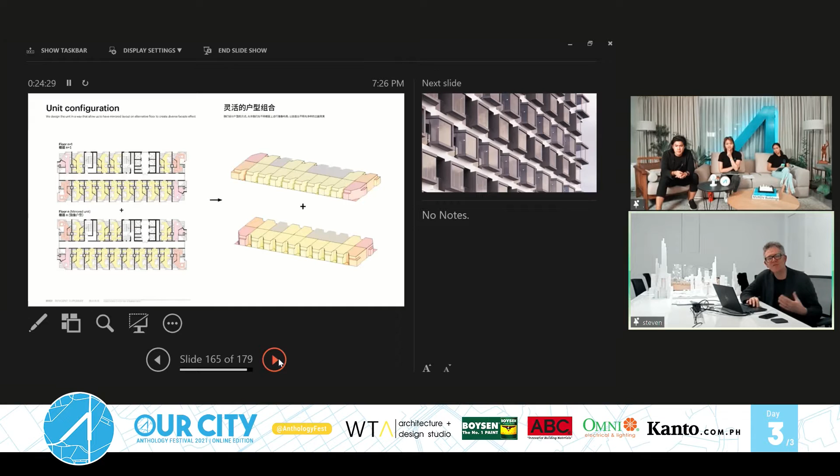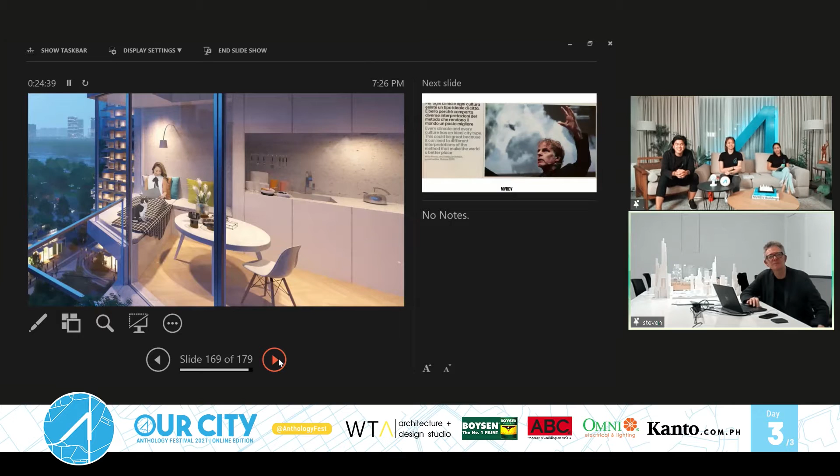Just getting towards the end, I think. How are we going for time? Hello?

Anyway, this is Winy Maas. Winy Maas is of course visionary, and he is very much into global design, where every climate, every culture has an ideal city design. This can lead to many different interpretations that make the world a better place.